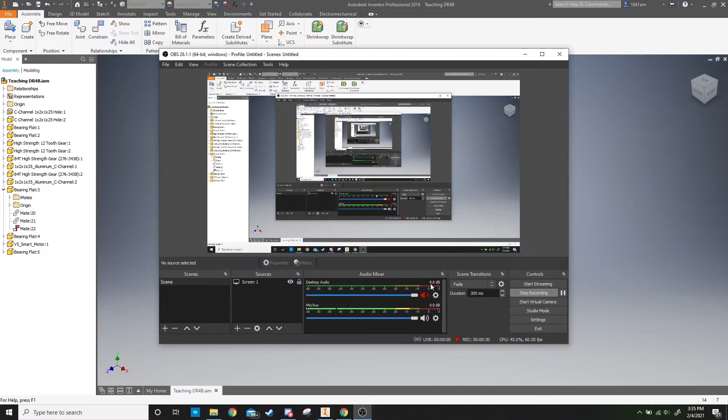Let's go over the dual reverse four-bar build. Last time we stopped with one of the pods being done, so the first thing we're going to do today is double this pod.

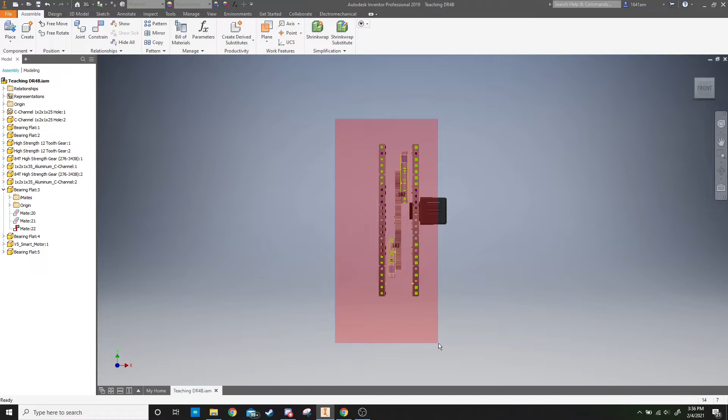There's two ways to do that. One way is how I showed you before: if you grab from the top left and drag to the bottom right, you get this red box, and anything completely selected inside of it will copy. So if the motor's not fully in it, the motor won't copy, but everything else will.

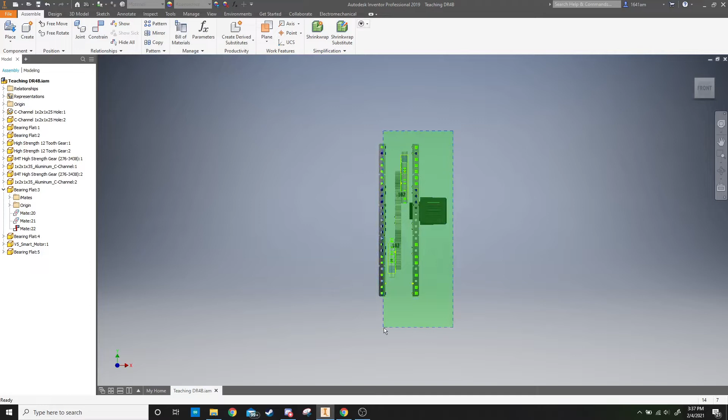Or you can use top right to bottom left, and anything that is touched will get picked up, even if barely any of the part is in there.

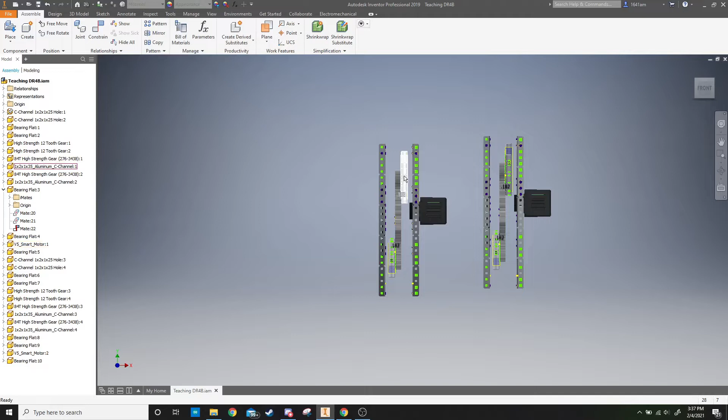So once everything's highlighted, you could just Control C, click somewhere over here, Control V, and you have another one. Now what you'd have to do with this is rotate it and switch a couple parts, because the motor has to be on the inside, and these are on opposite sides.

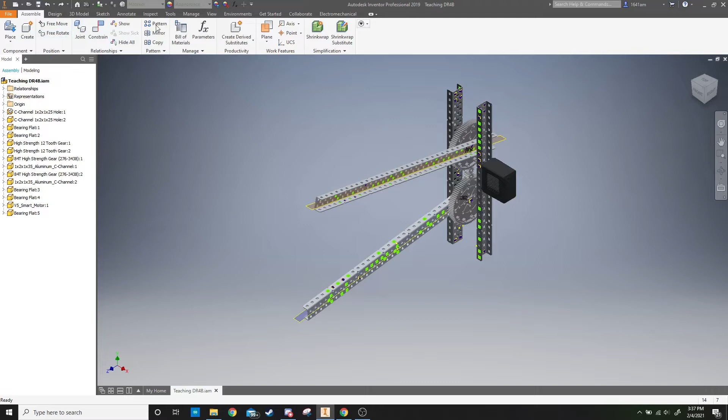So instead of that, I'm going to take the mirror tool, and you just want to click every part, since that's all the parts that are part of it so far.

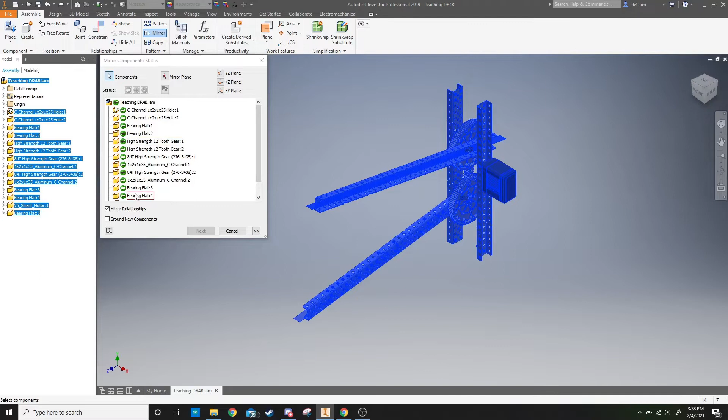So that's all of your components. Then the mirror plane - let's see which one of these planes. If we look straight on it, this plane is the right orientation, so that'll work.

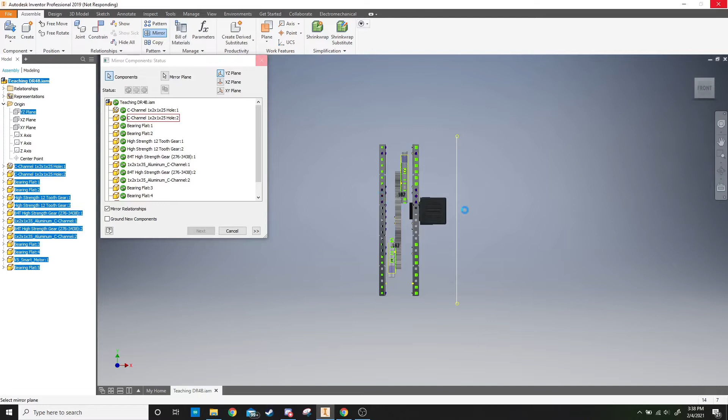And then we'll just have to move the parts either left or right in order to fix it. So we'll click that plane, because basically, if everything was reflected over that, it would be in the right orientation. See, it shows you a preview.

So now, for mirror relationships, you need to make sure that's clicked on. We don't want to ground new components because we're going to have to move them around. So then click next.

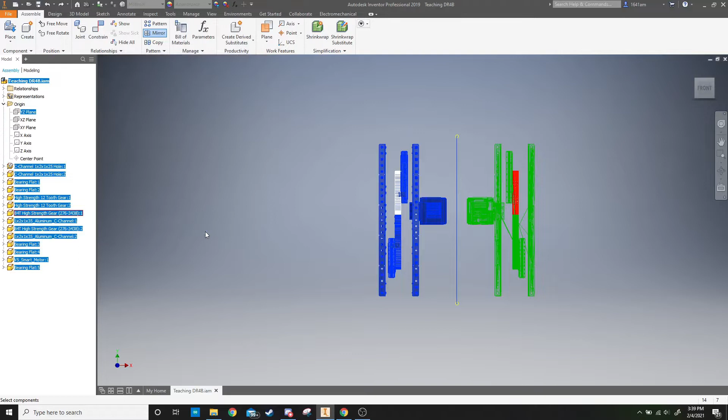It'll basically make this part - I'm not a big fan of it, but it's just the way it does it. It makes a different part with the same exact name, but underscore mirror. So just make sure you save it in the same spot that the project is in, because you're going to get a lot of file names when you start adding these mirror files in.

But you can just make sure they're inserting in the assembly. Oh wait, maybe I can turn off the suffix. Let's turn off the suffix, maybe that'll work - maybe it won't make a new one.

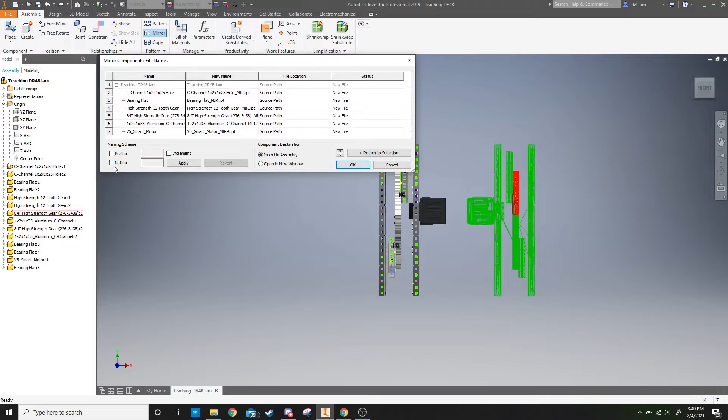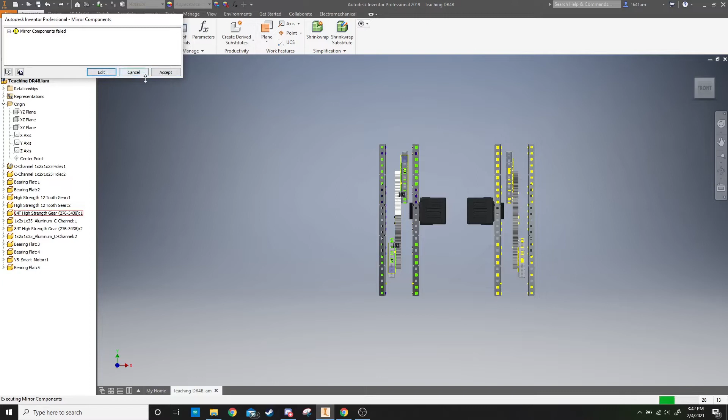And then click OK, and it'll take a couple seconds to render, and then all the new parts will pop in. Okay, I don't know why it says mirror components failed. Let's click accept, so you have all the mirrored parts.

Sometimes the relationships get messed up, so it's best to test it out. Just make sure - does this rotate? No, it does not. Okay, so we need to make sure the relationships are right.

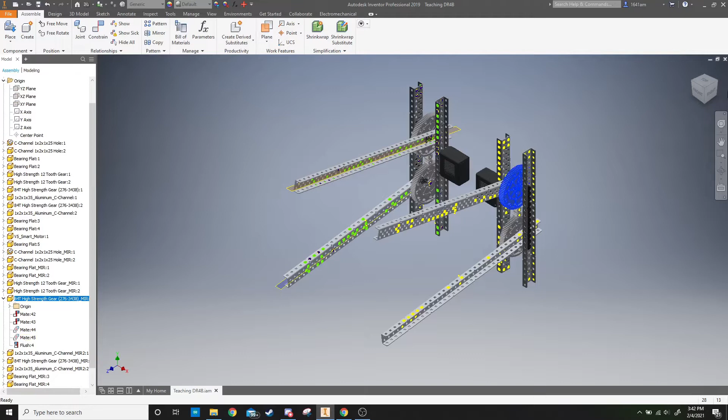It copied the relationship of this being grounded and this being grounded, but we don't want this one grounded because it's going to be moving in and out, so we can get the spacing right. So I'm going to right click that and unground it.

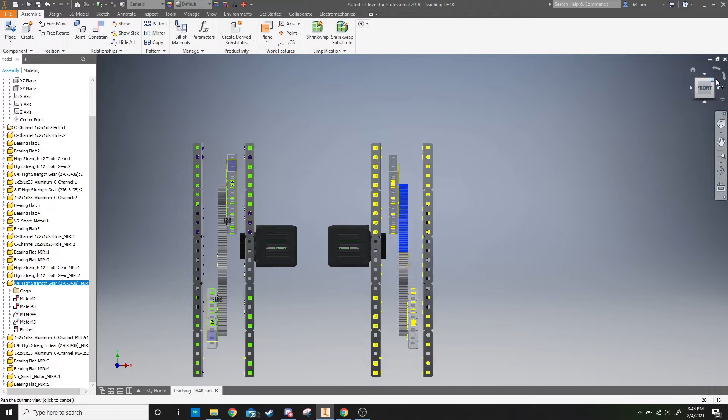Now you just need to do some diagnostics to figure out why it's not working. It's most likely a relationship thing. So what I would do is right click the relationship, and you can click suppress, which doesn't delete the relationship, it just makes it as if it wasn't there. So you can suppress it and then drag it to see if it'll work.

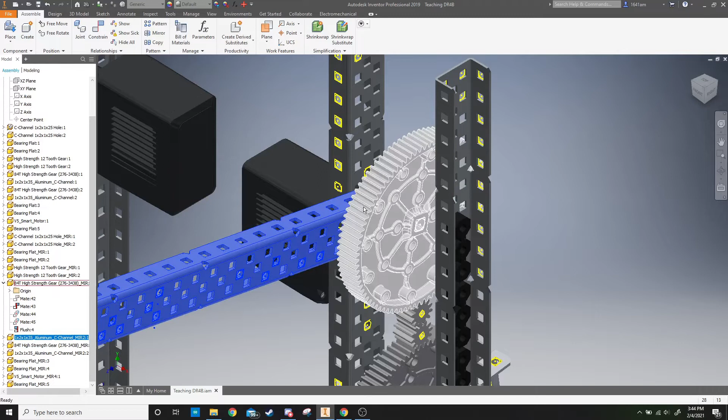Now I don't know why it's not working. Okay, what's wrong with this relationship? Okay, sometimes when this big exclamation mark is next to it, that means the relationship is broken. So we know that when we highlight over this, this is the relationship we use to connect the bearing or the axle guide to the metal C channel.

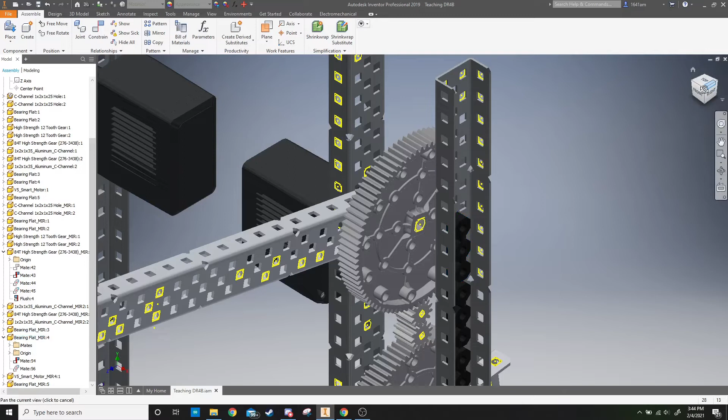So I'm just going to delete it, and I'm going to basically redo the relationship.

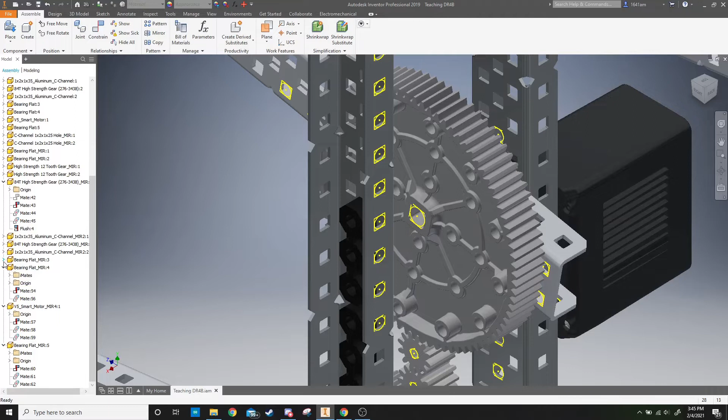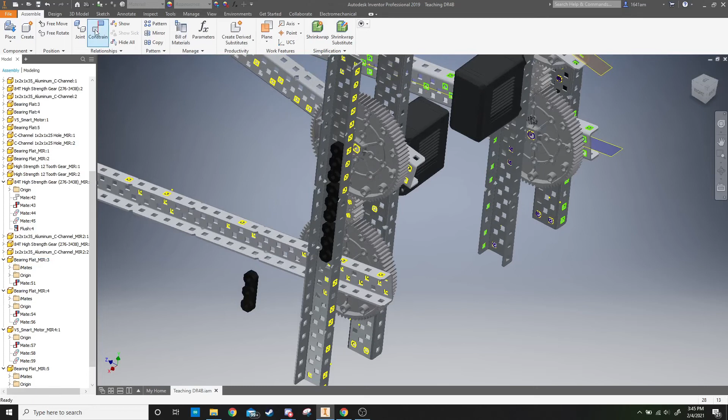Everything seems to be frozen. Is there a grounding relationship I'm missing? Which one is this? Okay, I'm going to delete both of these. There you go. So now that that comes off, we can constrain it back on so that it'll fit right.

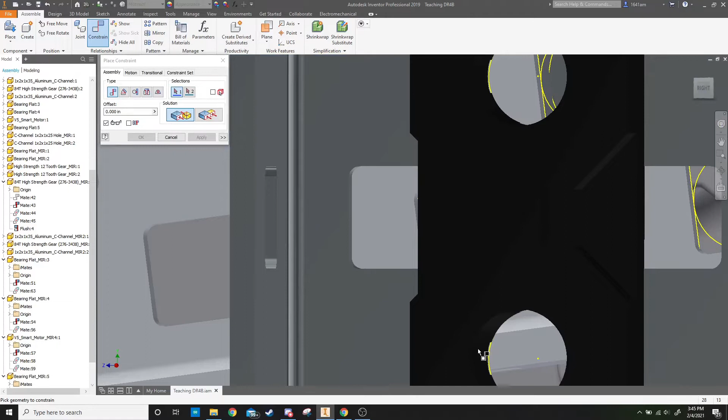My computer might also be a bit slow because it just did a big mirroring operation, so it might take a while to get back to its regular rendering.

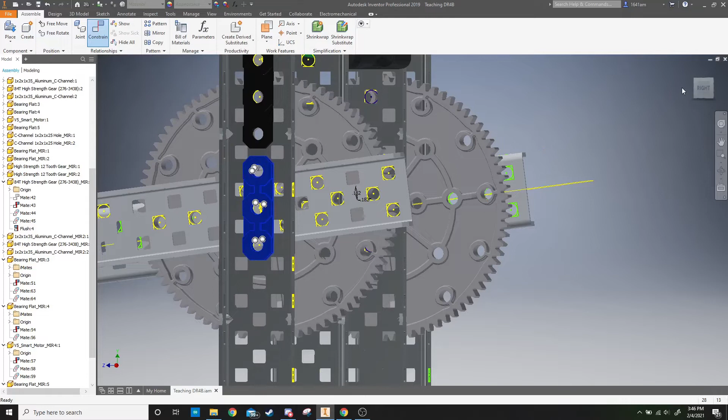Okay, so now that moves. We deleted those constraints that were broken, and I can see that this one moves, and that one moves too. Okay, so us mirroring that fixed it.

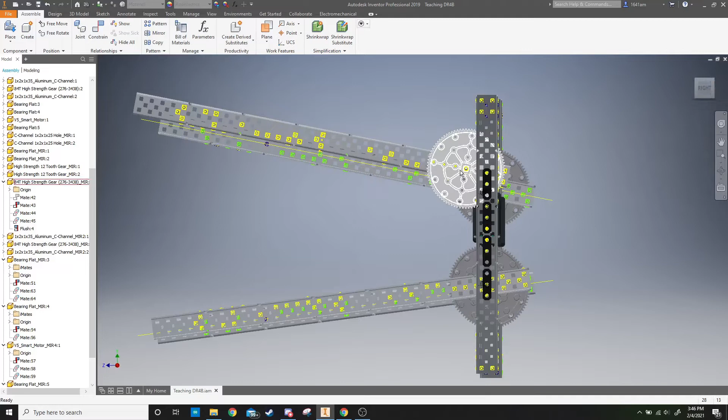And if you remember, I suppressed the constraint that had this going into the point. So what I can do is just go back over the constraint, right-click it, unsuppress it, and it'll snap back as if it never moved.

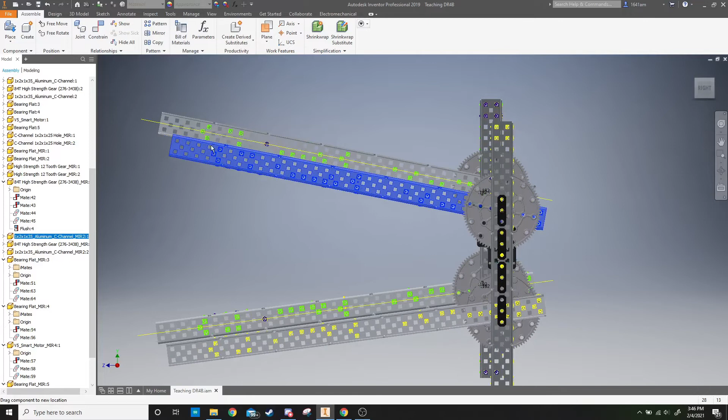Now, as you can see, when I grab this to try to move it around, it doesn't rotate because it's just moving the whole piece. So if I wanted to test to make sure it rotates, I could just take this part, ground it just for a second, and then take this and see, now because it's moving against something that's grounded.

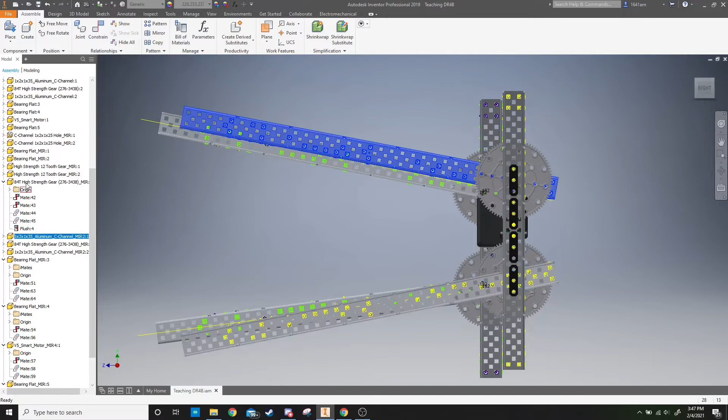We can test it to make sure that these spin. Okay, so they spin. So now let's unground that piece and let's line it back up. Oops, you're gonna get some weird movements like this when everything is not constrained completely. Okay, so that's moving weird. So let's constrain it to fix it.

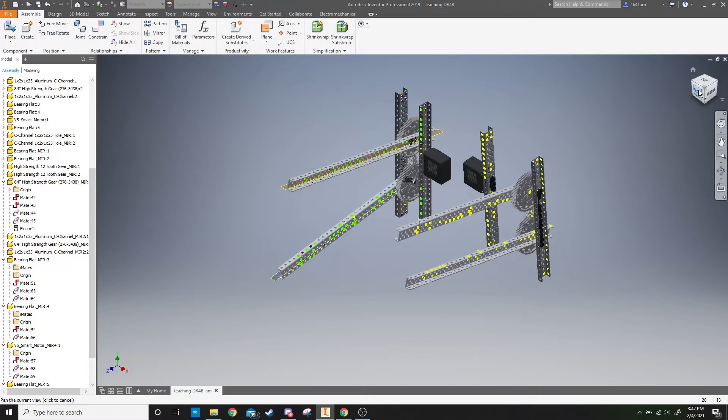So basically, when you're building a 4-bar, it's going to be like this, except they'll be flat with each other. So we need to put a bar that goes across the top of here to screw it in, and across the bottom of here to screw it in.

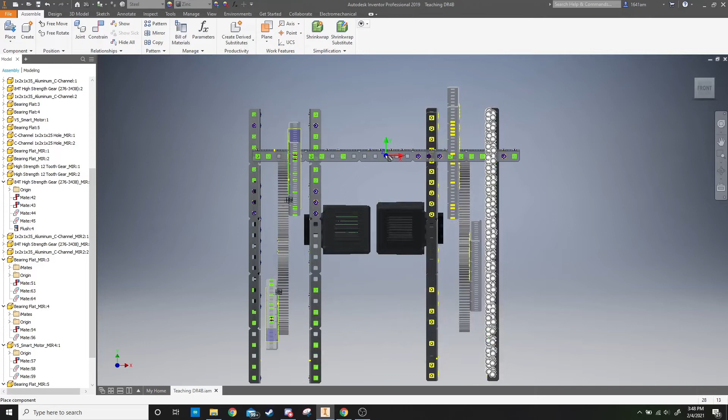So I think that what you should do just to make sure that something fits is when you go to your robotics CAD, you go to your kit of parts, and then under structure, you can go to the 5-bar and open it, and you can just hold it up to see if it would fit right. So this still fit right because you want the motors to be as close as possible so the profile of this is reduced.

Another way that this design could be made is actually with the motors on the outside, which could put your center two columns even closer. So if your design requires that, that's actually a good way to do it. So I'm going to place one bar up there and one bar down there, and then press escape.

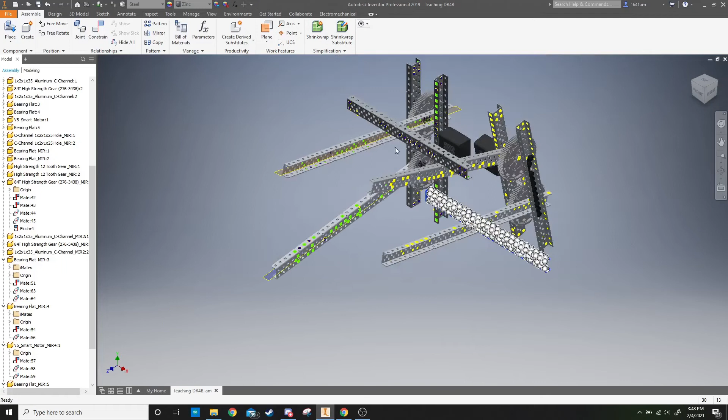And now let's constrain these. So I'm going to constrain them to the bars that are stationary right now, because as you remember, this is our backbone piece because it's grounded. So let's start by constraining these to it.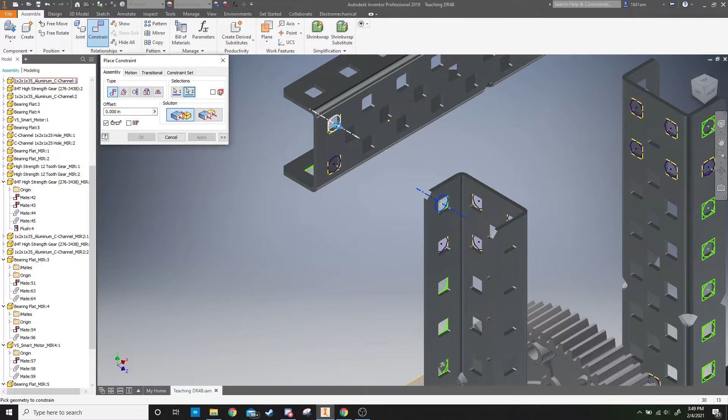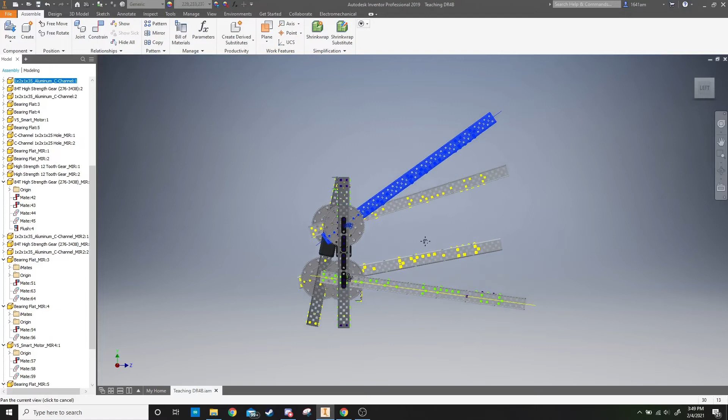So you want to screw these in at the very edges, because let me put it in place and then I'll show you. So if this was your actual design and you were building it, you want to have as much reach with these as possible. So basically this can only go as far as either that bar hits the top bar.

So like this can only spin as far as until it hits that back bar, right? But we're gonna have to put more support at the top. Like this isn't enough support to make the entire thing not fall apart.

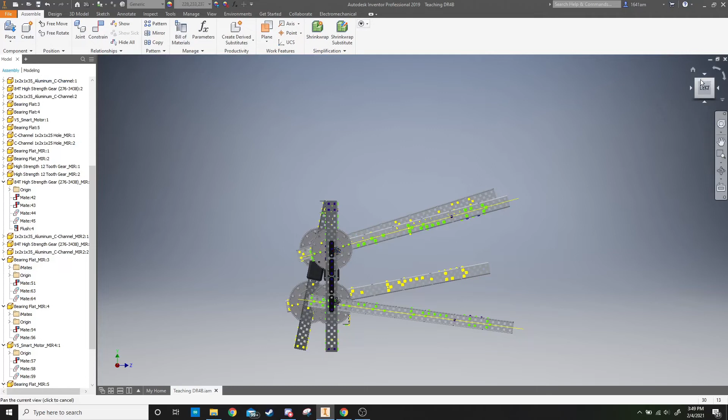But also a problem that you encounter with limited reach, or your possible limits to reach, is this bar sliding all the way up when you're extending. And if you have to, this back piece right here might interfere with the gears right here. So that's your other limit. Like this can only go back far enough until you don't want it to accidentally hit those gears.

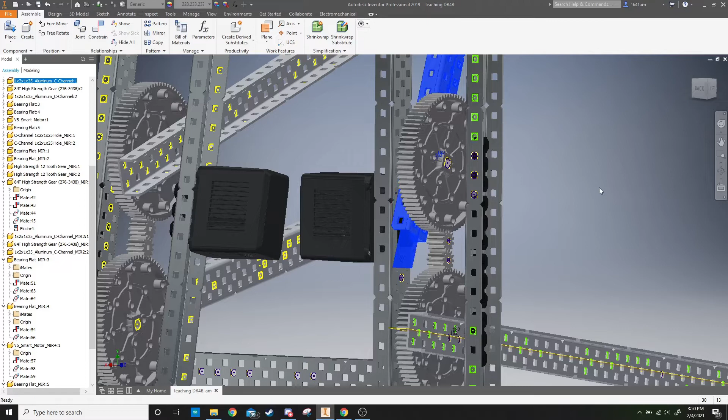So it can only go back about that far. So you have a lot of range, but those are just your two things to keep in mind. That's why we put it on the back. So let's finish constraining that by taking this face and connecting it to this face.

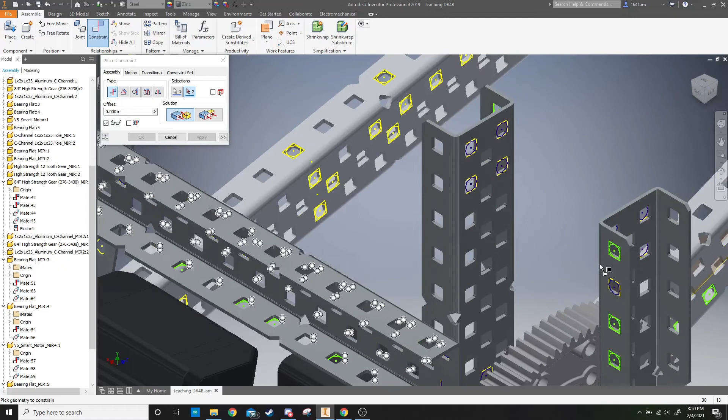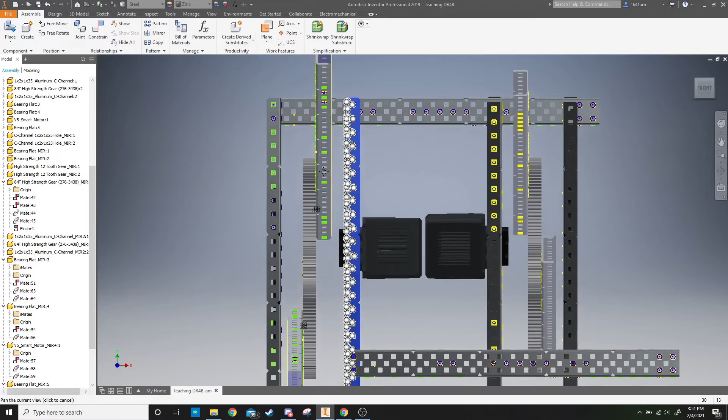And now what we need to do is this bar is screwed in, but this one needs to get screwed in. So if we look at it from a bigger perspective, if we wanted to screw this in right here, we would have to move this over so we can edit that constraint that we made in the last one, this one right here.

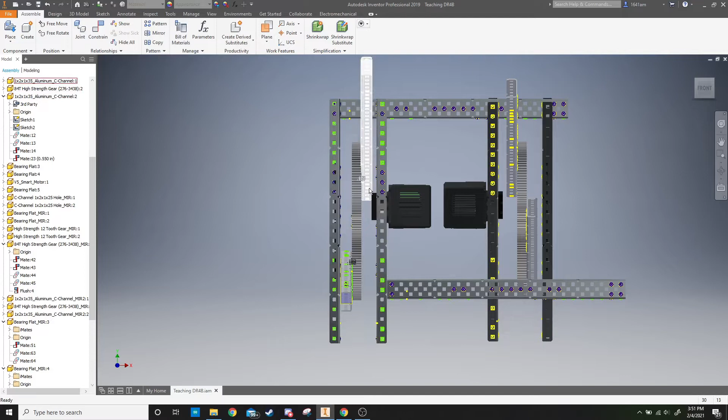to test different sizes. So if we wanted to try maybe reducing the space a bit, see, you could maybe fit it in there, but I say that's too close. You want to give yourself a bit more room just to make sure nothing goes wrong. So I would say stick with 3/4 of an inch and just move this bar to be out one more, so that you have 1, 2, 3, 4, 5 holes in between.

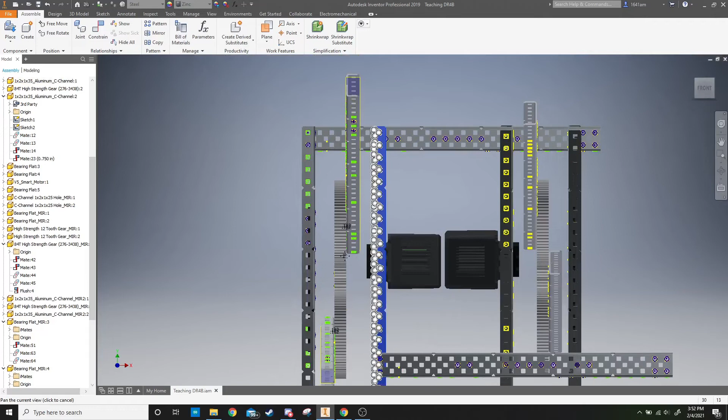Because if you have the space in your 18 by 18 by 18 inch limit for building a robot, I would give yourself more space around parts that are spinning and moving, like these gears and this arm, because then it makes it less likely that things will hit each other or mess up.

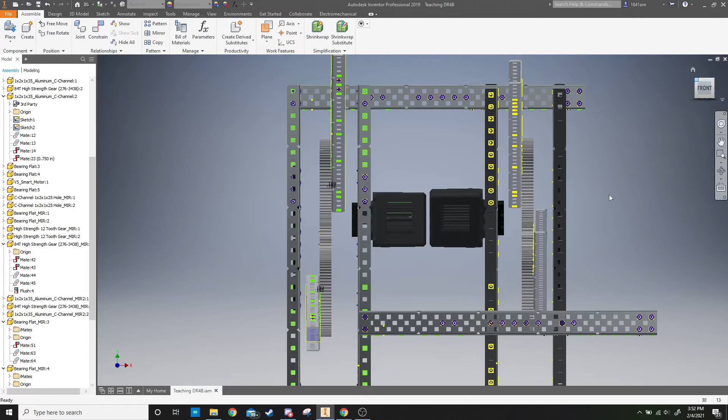So then let's do the first constraints for our bottom one too. So we're going to make that circle, make sure it's undirected.

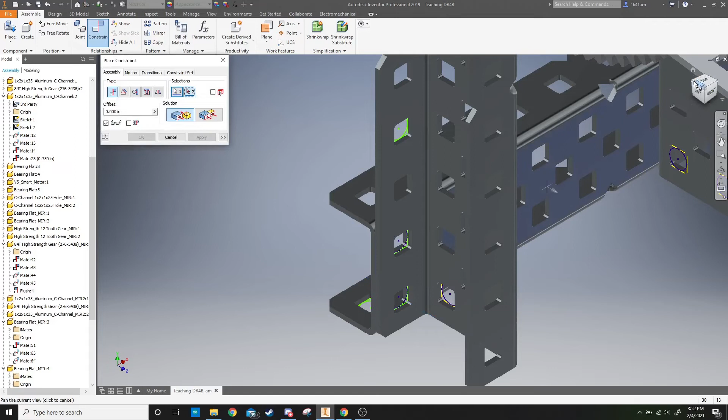Okay, and now if you may have noticed before, we don't actually have the circles on this top bar for us to screw it in there. So let's just click the top bar, find it in the browser. You can close all these mates once you finish finding out and diagnosing whatever happened in the mirror. So let's open up this part.

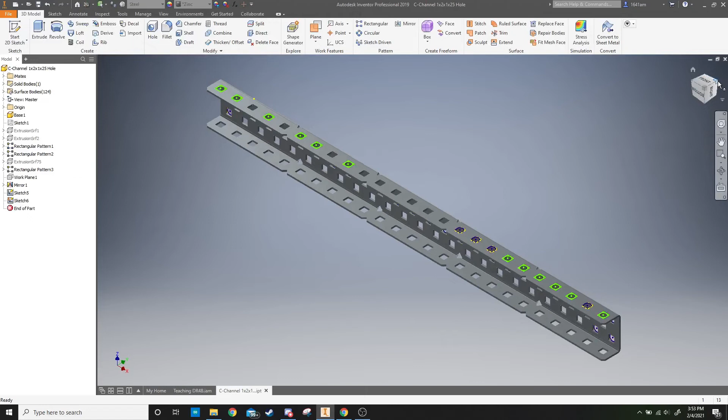Let's put in the orientation as we have it in our model. So it's set up like this in the model because when I come back to this, I can see that we have the 4 holes there. So we know that we have to draw the holes 1, 2, 3, 4, 5 after the edge.

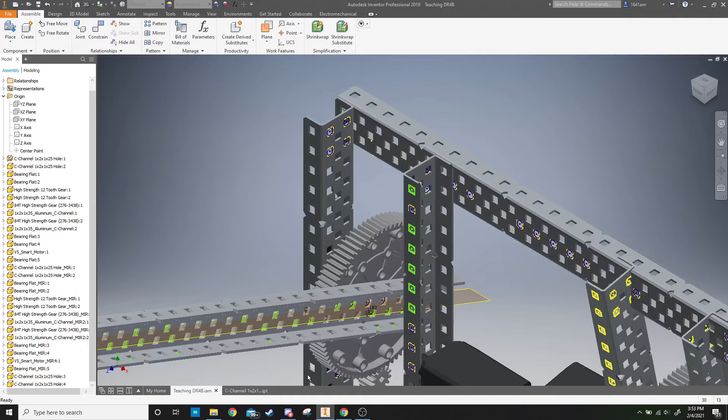So let's go back to the sketch that we created on this face.

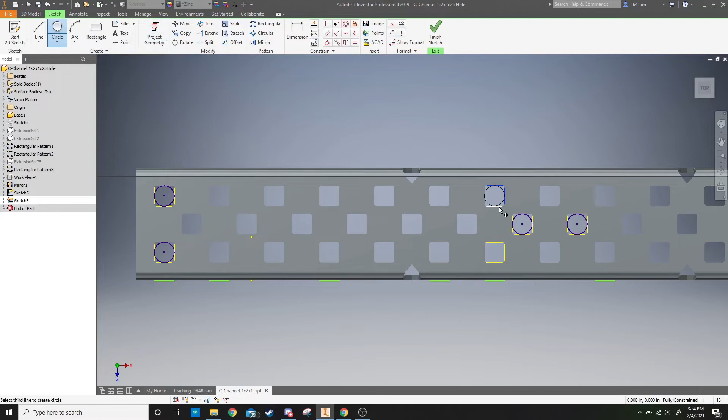Click project geometry, and we go 1, 2, 3, 4, 5. This is where we're working. Then change your circle type to a tangent circle, and pick the 3 lines that you just projected. Finish sketch, save the part.

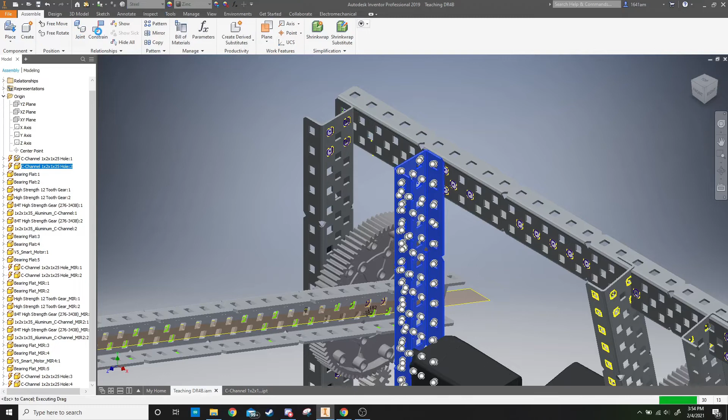Now we have the circles that we need to constrain. We can shift it over a bit so we can see them. The screw head, I would put the heads on the outside coming in, and then put the nut right there. So even though the screw is over here, we can actually use this one to connect it.

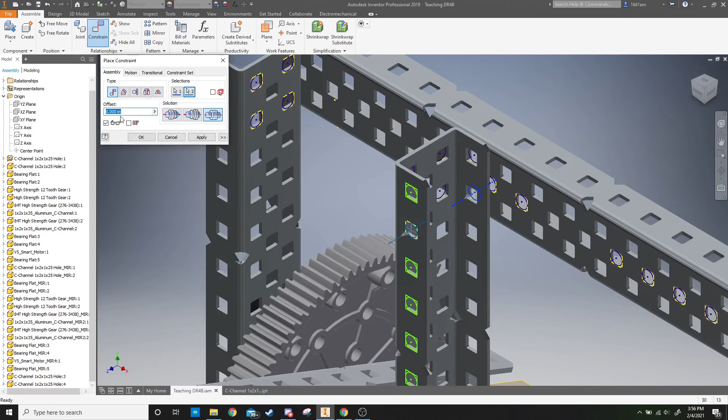Make sure to do the second one too, just in case anything comes undone, you still have it connected. Now this one can't be moved, this one can't be moved, that one can't be moved. Now we constrain this bar to the top, so we really don't need to constrain it down here. That's just a bit excessive.

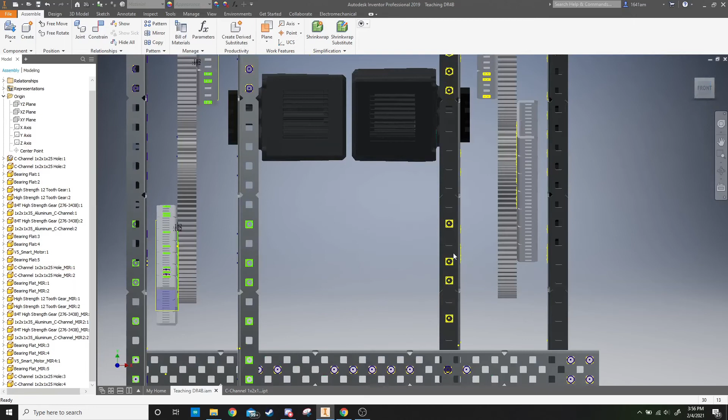So the next thing that we need to constrain is this other part of the bar. We want these motors to be close so that we're using as little space as possible, but not so close that it doesn't work.

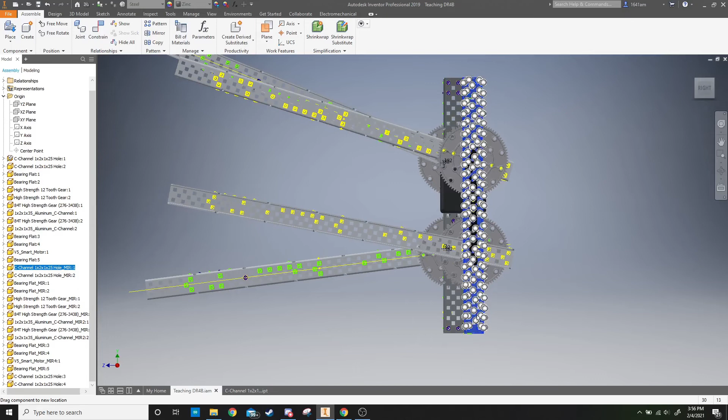If I mess with the part to get it back into place a bit, and look at it from the front, it looks like screwing it in those holes right there would work because we have a bit of space in the motor. If we shift it 1 over, that doesn't work because the motors are intersecting. So it looks like that's where we're going to end up having it.

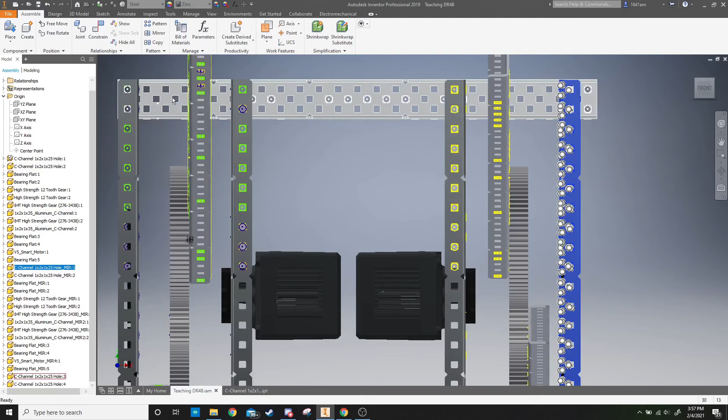Since this has to be symmetrical, we have 5 holes in between here. So we need 1, 2, 3, 4. This has to go there at 5, because we have to make it symmetrical, otherwise that just opens a whole can of worms that you don't want to get into.

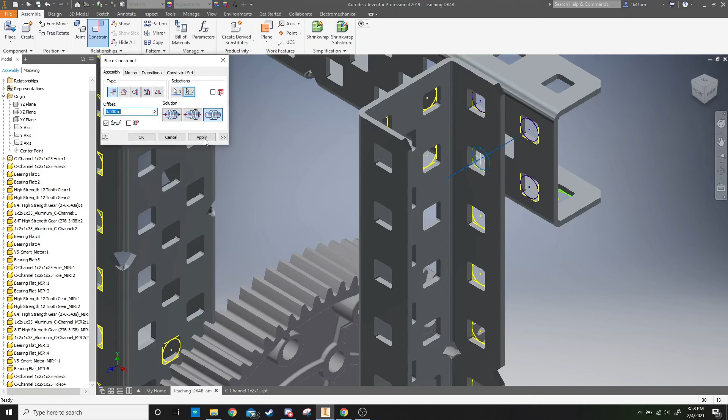So we can start by constraining this side. If we drag this part out of it, we can see the circles that we already made and the circles on the bar. Then we want to click this face and this face. Now that means that this last bar is connected.

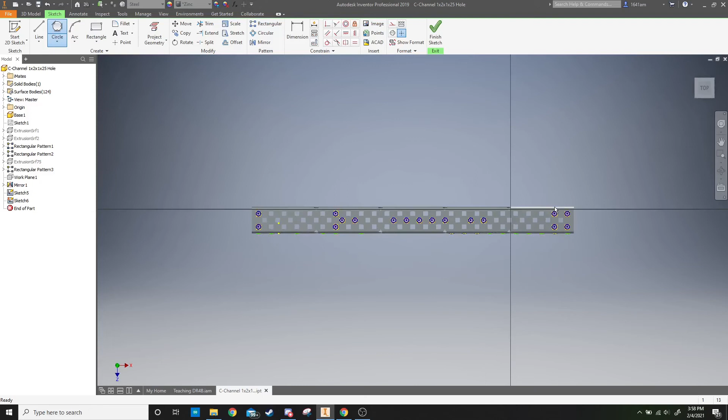The only thing we're not connecting yet is this center bar, but we don't have holes for it yet, so let's go back to the other part that you should still have open in the browser. Go back to the sketch that we had. Since we know that the last bar is connected here, we know that there's 5 holes in between.

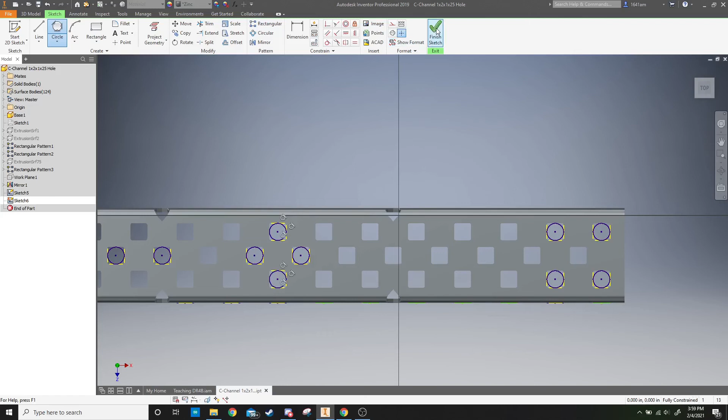So 1, 2, 3, 4, 5. We know that the geometry we want to project is right here. Then we want to make the circles right there so we can connect it easier. Make sure to save your model.

Make sure to save your assembly. Once it saves, you can drag this to the side just so you can see the circles we just made, to constrain it easier. Then open up the constraints menu.

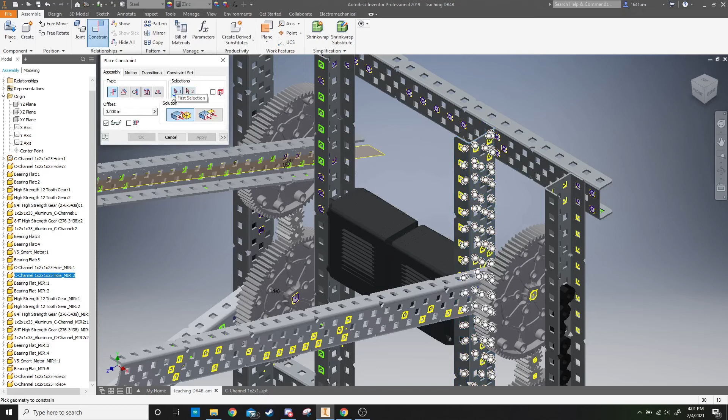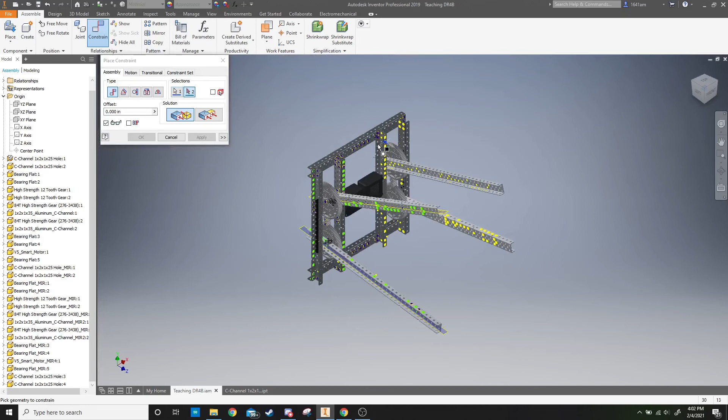I'll click the top circle and the top circle, then click one down, get a different view so we can see it, and click the other one that's one down, and click OK. Now nothing moves, except for these rotating parts should move. And these rotate.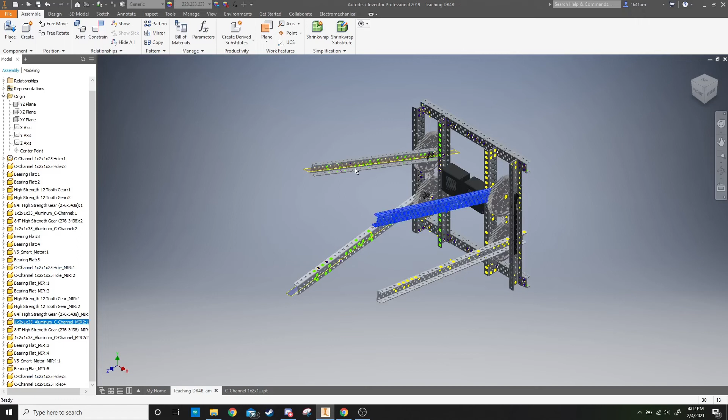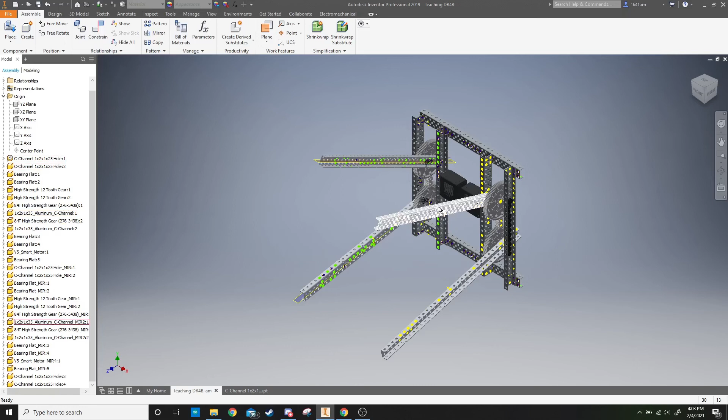So now, this is the part that will probably take you the longest to build. Before we do applications, what you should do is, in reality you would have a bar going across here, because if you don't have something bracing these, one will go up and they'll get all wonky and won't stay in line, and it'll be really weak. So in reality you'd have a bar across here, but while you're still designing, you don't know where the bar will go.

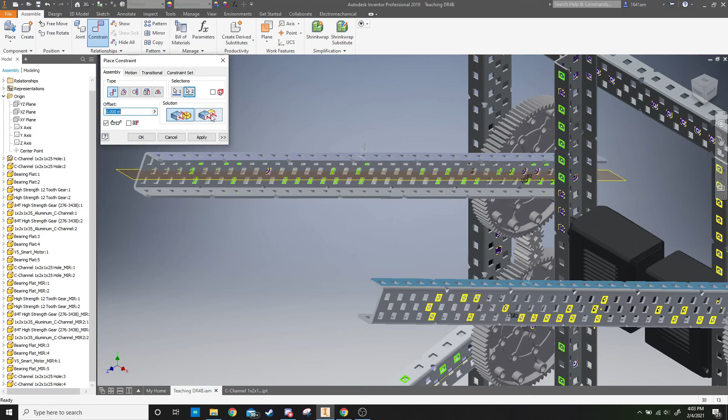A good thing to do while you don't actually have the bar there yet is you can constrain the top of this face and the top of this face, and now that'll have to be flush, so switch it to flush and click apply, then the same thing on the bottom, click the top of this face and the top of this face, make sure it's flush, then click OK, and now they'll move together.

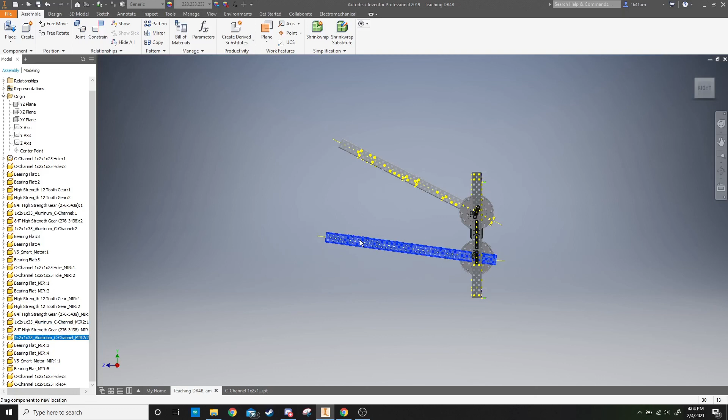So your robot would basically start in this position, something like this—maybe not as extreme as that. But up here, there would be a bar that comes down and screws into your chassis right there. And your chassis would exist down here in like a square right there.

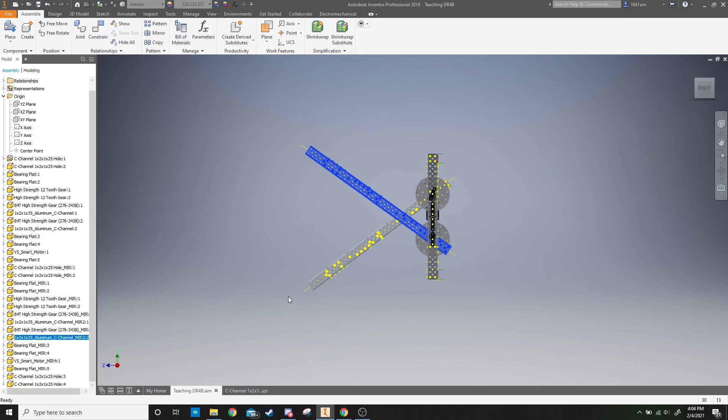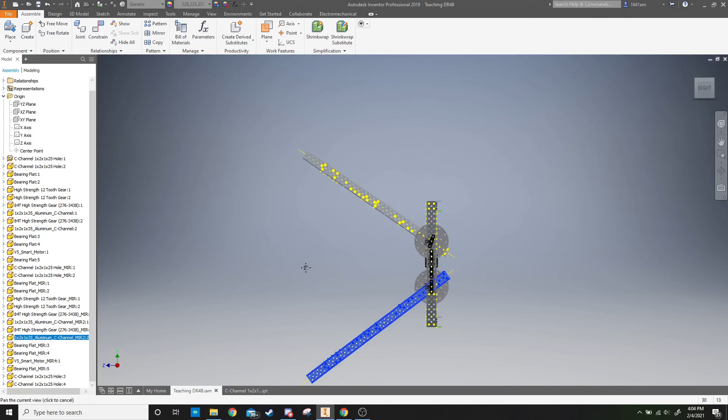Since the chassis is here and the bar is there, then when it extends, it'll go like this. It's kind of hard to see it. We'll work on an animation after this to show it better. The robot will go like this, and it'll be all the way up there.

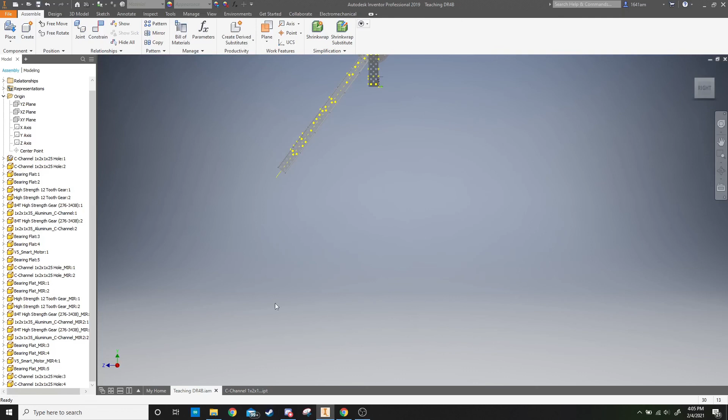Well, then the bar is right there, and the chassis is like all the way down there. So you have the chassis, the bar that it's connected to, and then it goes up and up. So that's basically the main part of the reverse 4-bar finish. I hope that helped.